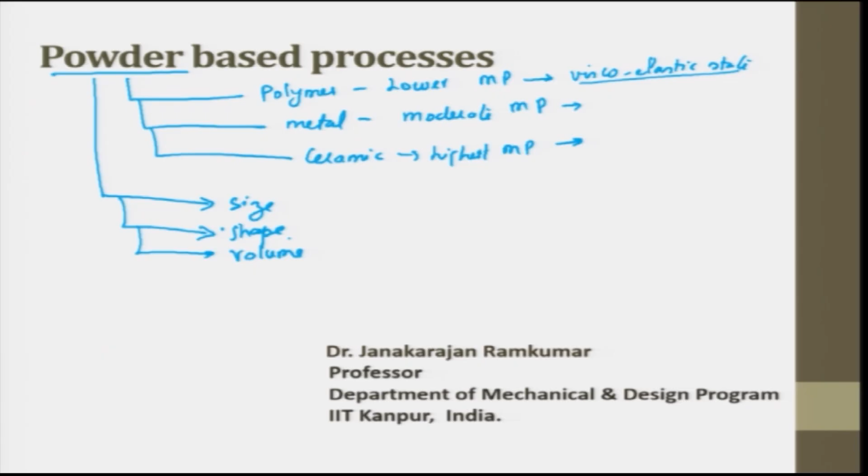So in this lecture, we will be trying to cover what is selective laser sintering process, called SLS. SLS process description will be there. Then we will try to see what is solid state sintering, then chemical induced sintering, then approaches to metal and ceramic part creation, then liquid phase sintering, then distinct binder and structural material.

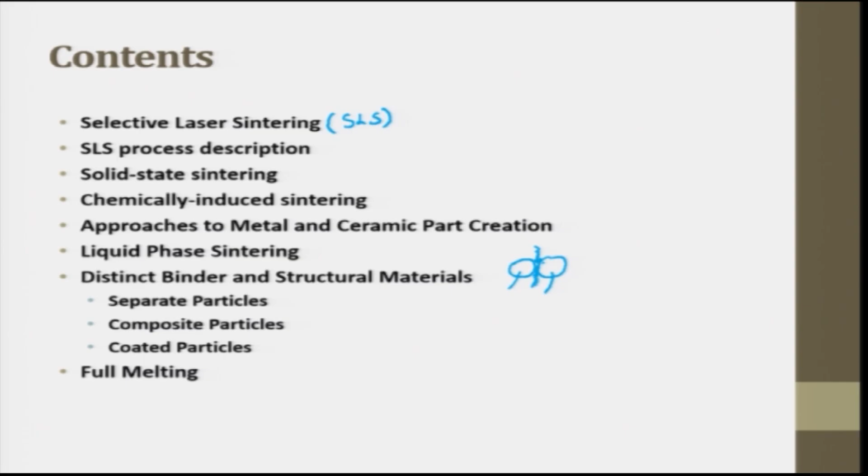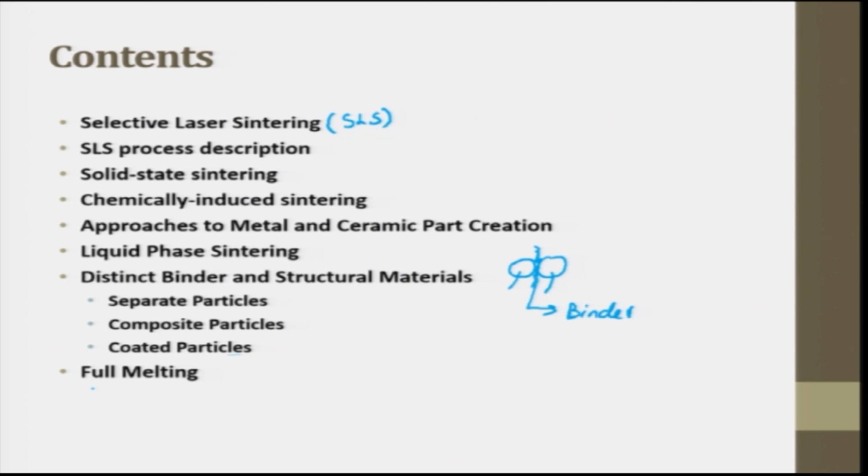Because when we try to have particles like metals and ceramics, their melting point is very high, so in order for these to join, I can't melt it, I can't take it to such a high temperature. What I do is try to add a binder in between. So this binder alone I will melt, and this melt is used for joining these powders. So distinct binders are used. The binders and structural materials involve separate particles, composite particles, coated particles, and finally we will see the full melting process.

The powder bed fusion process were among the first commercialized RM processes, commercially available even before stereolithography could go to its fullest extent. Powder bed fusion: powder bed is the starting material, fusion is the joining. Developed at the University of Texas at Austin, USA, selective laser sintering was the first commercialized powder bed fusion process. All other powder bed fusion processes modified this basic approach in one or more ways to enhance machine productivity, enable different materials to be processed, and or to avoid specific patented features.

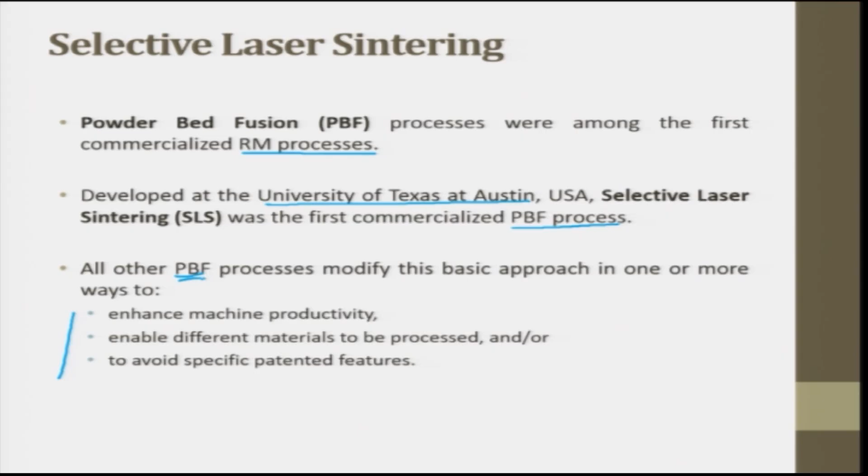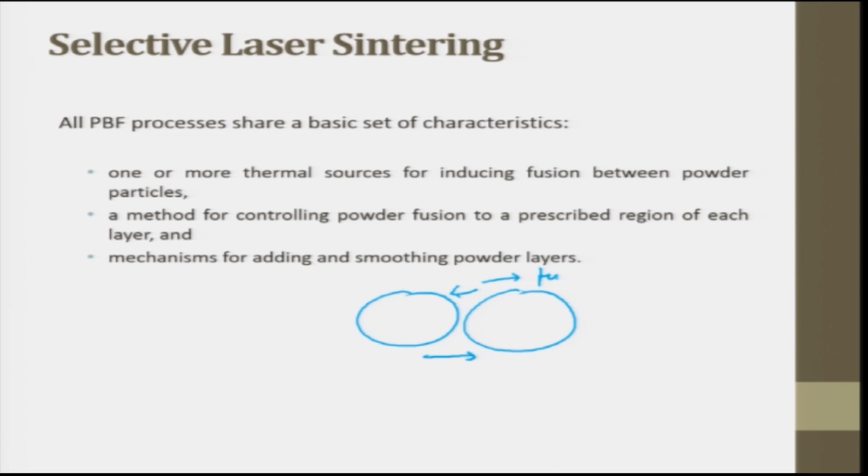So for these reasons, the PBF, powder bed fusion processes, were modified. All PBF processes share a basic set of characteristics: one or more thermal sources for inducing fusion between powder particles. What is fusion? Powder particle joining is called fusion. A method for controlling powder fusion to a prescribed region of each layer, this is what is called selective. Then a mechanism for adding and smoothing the powder layer. So these are the three characteristics.

So if it is clear from the name itself, we selectively sinter using a heat source called laser. Why laser? Laser is more focused, so I can easily achieve selective sintering by using laser. That is why the process is called selective laser sintering process, which is part of powder bed fusion process.

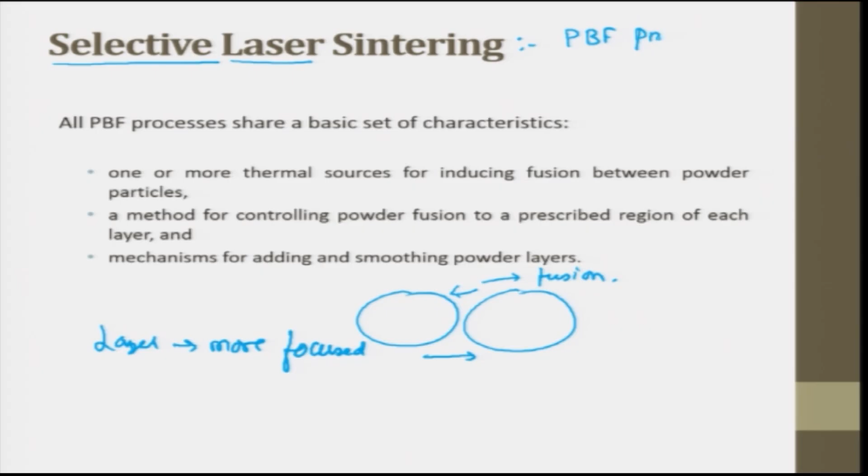The SLS process was originally developed for producing plastic prototypes using a point-wise laser scan technique, which is vector-based, similar to what we used in stereolithography. This approach has been extended to metals and ceramic powders today, with additional thermal sources utilized. Variants of layer-wise fusion of powdered material now exist.

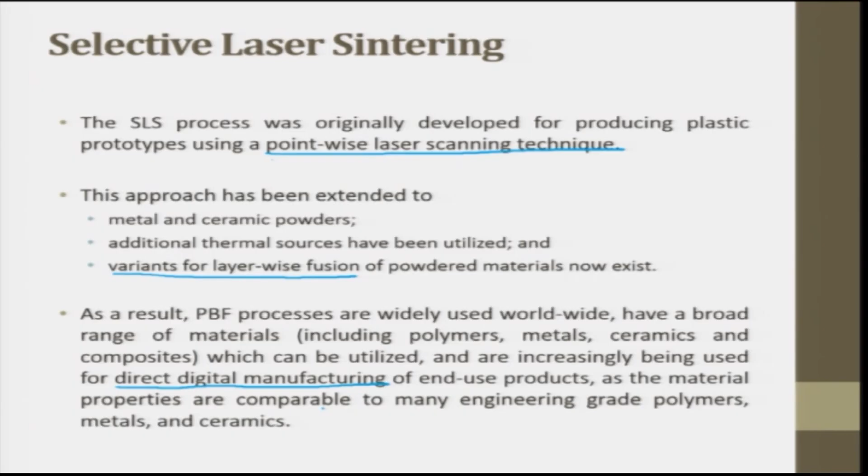As a result, powder bed fusion processes are widely used worldwide, with a broad range of materials including polymer, metal alloys, ceramics and composites, which are increasingly being used for direct digital manufacturing. Rapid prototyping, otherwise called direct digital manufacturing of end-use products, has material properties comparable to many engineering grade polymers, metals and ceramics.

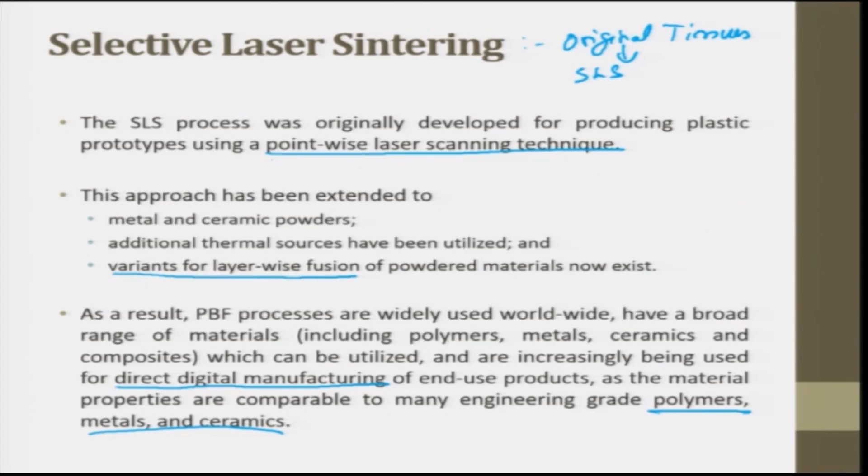Today we are trying to make original tissues which can be printed and integrated into our body. So we use polymers and a process called SLS because we need very high resolution. So tissue which is going to be integrated as part of the body is nowadays printed using this process.

So if you look at the process description, it goes like this. You have a table, and if you see, it is divided into three segments. The second segment is going to be the powder bed.

This powder can be polymer powder, metal powder or ceramic powder. This powder which is fed onto the powder bed comes from the container called the feed cartridge. You can call one the input cartridge and the other the extra collection cartridge, but really these two should both be called feed cartridges.

So you have cartridge 1 and 2, which are feed cartridges, and the powder bed in the middle. The moment I say feed cartridge, the material flows from this cartridge to the powder bed. Every time the table has to sink by a layer, and correspondingly the cartridge has to rise by one layer.

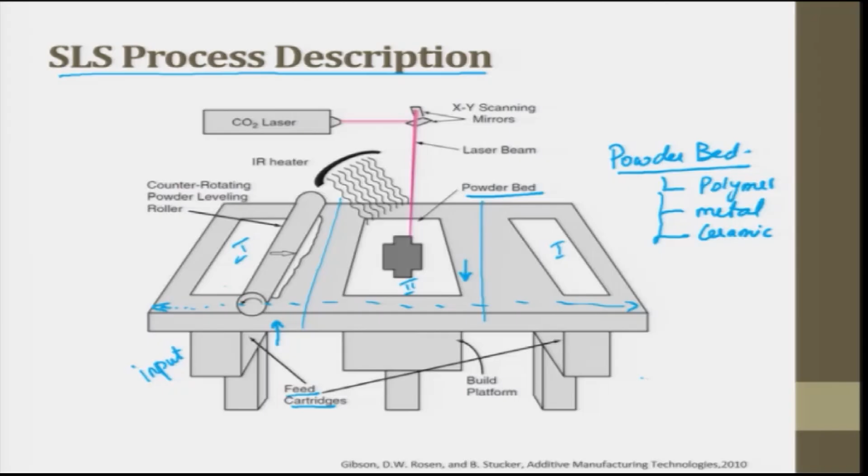Once the roller does this job, then the CO2 laser comes into action. The CO2 laser hits a galvo scanner, and this galvo scanner passes the light to exactly hit selectively on the top surface of the powder bed. When it does hit, it does the boundary and also the hatching, which is all internal hatching, and this forms one layer of information.

Now the table sinks down by one layer of information. The roller on the other side starts pulling up powder from the feed cartridge and keeps moving. Once the powder bed sinks down, that cartridge rises by a corresponding layer thickness, and powder from this side is spread on top of the powder bed. This keeps happening continuously, and finally you get layer by layer of selective sintering, resulting in a finished product.

In between, to maintain or remove moisture, we always use an IR heater. Its function is to remove moisture or excess polymer material, and maintain the temperature such that when the next layer is cured, it sticks properly with the previous layer. Otherwise, if there is no heat, the first layer cures very fast, and when the second layer tries to cure, delamination happens, which leads to defects.

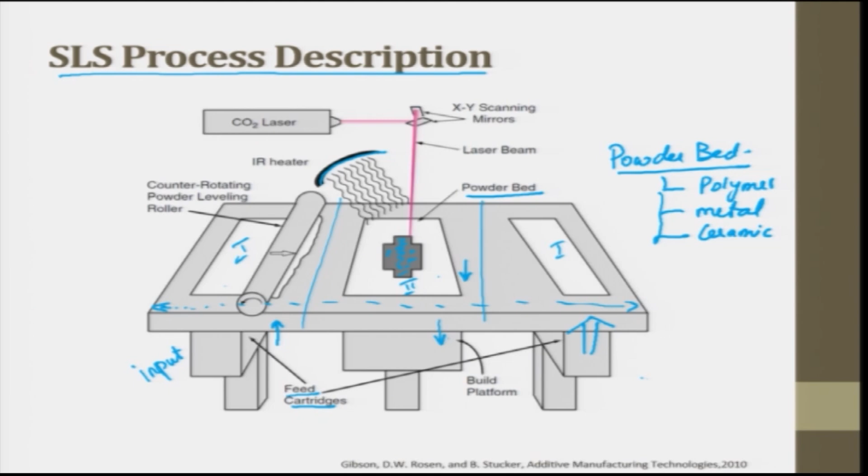So this is what happens in the selective laser sintering process. In order to provide a baseline description of the powder fusion process, selective laser sintering will be described as the paradigm approach to which other powder bed fusion processes will be compared. SLS fuses a thin layer of powder, typically around 0.1 mm.

This is 100 micron. So with the SLS process, being powder based, the layer thickness can be a few hundred microns, which are spread across the build area using a counter rotating powder leveling roller. The part building process takes place inside an enclosed chamber, whereas in the previous schematic diagram it was open.

Generally what we do is perform this in an enclosed chamber, and in that chamber we try to maintain a temperature filled with nitrogen gas to minimize oxidation and degradation of the powder material. Because whenever there is heat, oxidation easily happens. In order to avoid this, we put a chamber and fill it with nitrogen gas.

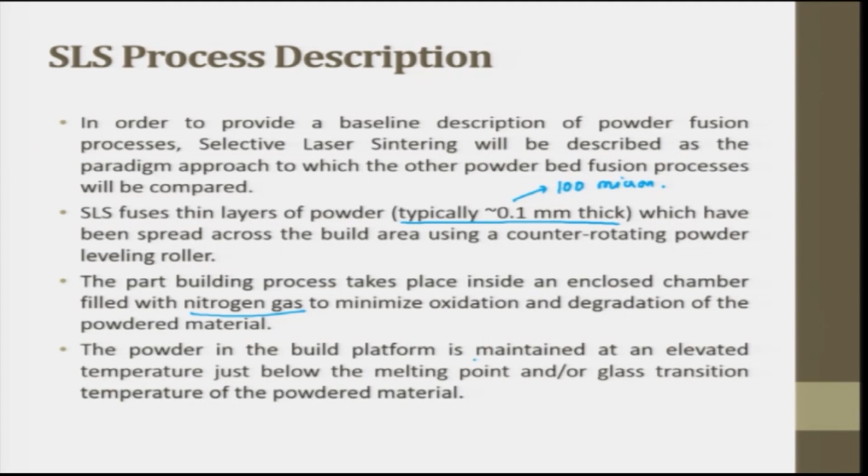Nitrogen gas is non-reactive. The powder in the build platform is maintained at an elevated temperature just below the melting point or glass transition temperature of the powder, such that it sticks with the previous layer.

Infrared heaters are placed above the build platform to maintain an elevated temperature around the part being formed, as well as above the feed cartridge to preheat the powder prior to spreading over the build area. That's what I said - if there is any moisture, or any unwanted polymer slightly mixed in, all these things get gassed away and removed during preheating.

In some cases the build platform is also heated using a resistive heater - it can be infrared or resistive. This preheating of powder and maintaining an elevated uniform temperature within the build platform is necessary to minimize the laser power requirements for the process.

This is a very important point - that is why we try to preheat the powder, necessary to minimize the laser power requirements of the process, and to prevent warping of the part during building due to non-uniform thermal expansion and contraction. So it removes warping, prevents warping, and is necessary to minimize power. These two are important points.

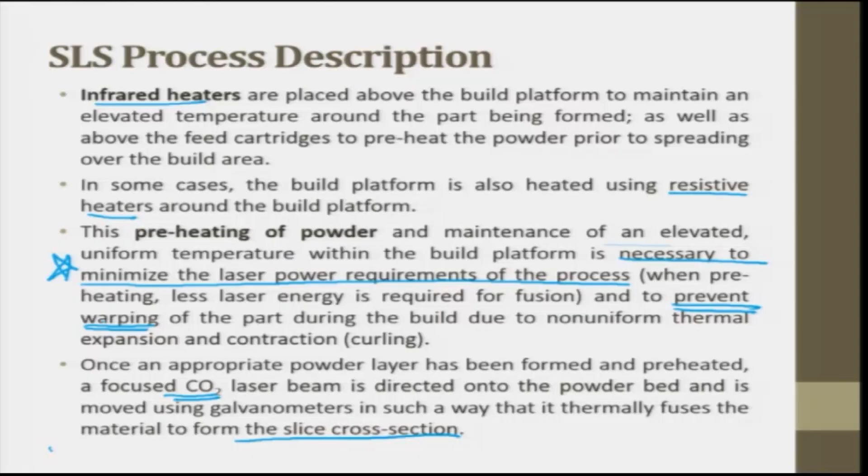The surrounding powder which is not used remains loose and serves as a support. Earlier I was talking about a structure like this, right? We said it will have a supporting structure - so this is a supporting structure.

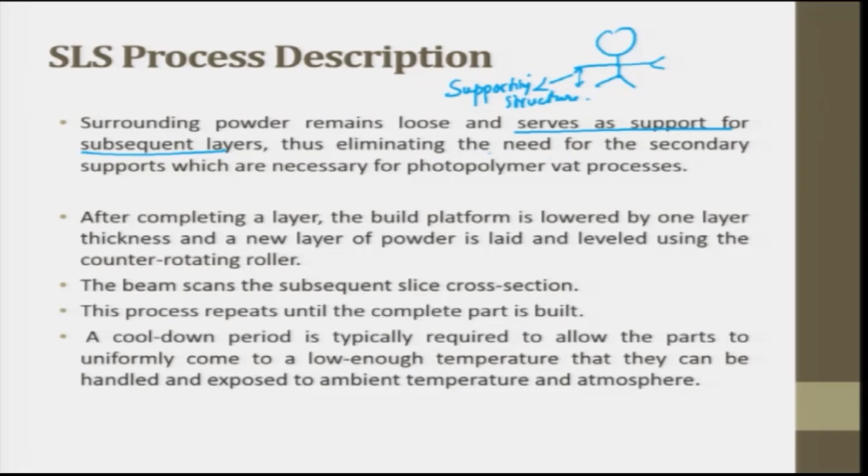In SLS, there is no separate supporting structure needed - the loose powder remains and serves as support. So here we don't put a supporting structure. The powder which is not cured acts as a supporting layer, thus eliminating the need for secondary support which is necessary for photopolymerization vat processes.

After completing a layer, the build platform is lowered by one layer thickness and a new layer of powder is laid and leveled using the counter rotating roller. The beam scans the subsequent slice cross section. This process repeats until the complete part is built.

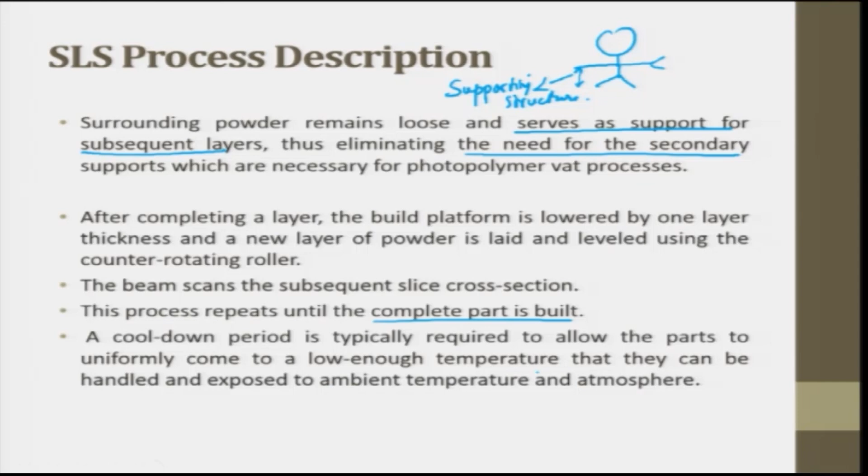A cool down period is typically required to allow the part to uniformly come to a low enough temperature that it can be handled and exposed to ambient temperature and atmosphere. If the part or powder bed are prematurely exposed to ambient temperature and atmosphere, the powder may degrade in the presence of oxygen and the parts may warp unevenly.

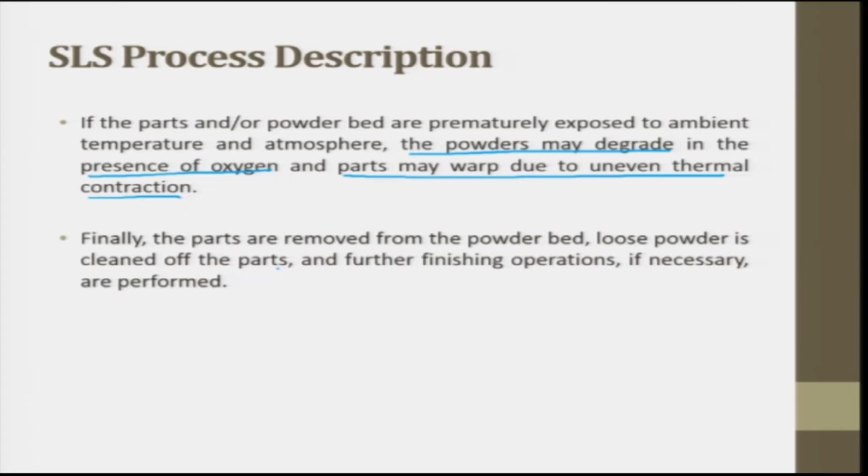Finally, the parts are removed from the powder bed, loose powder is cleaned off the parts, and further finishing operations, if necessary, are performed. These are called secondary operations.

So when we look into the primary powder bed fusion process, we have the following classification - we have four classifications.

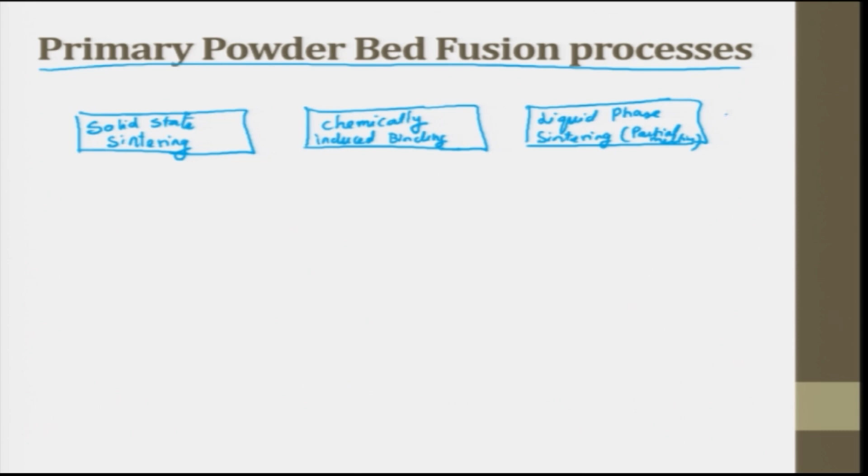One is solid state sintering. Next is chemically induced binding. The third one is liquid phase sintering, which is partial melting. And finally you have full melting.

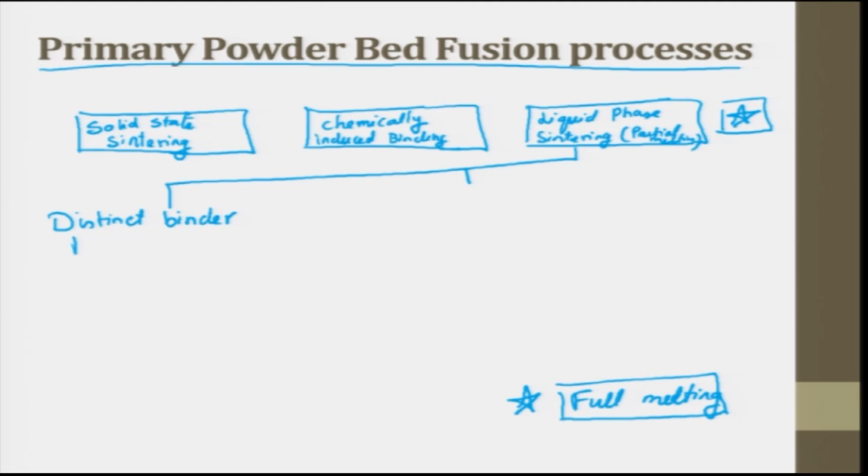This partial is distinct between binder and structural material. One is separate particles, composite particles, and coated particles. When I try to look at it, it's indistinct between binder and structural material.

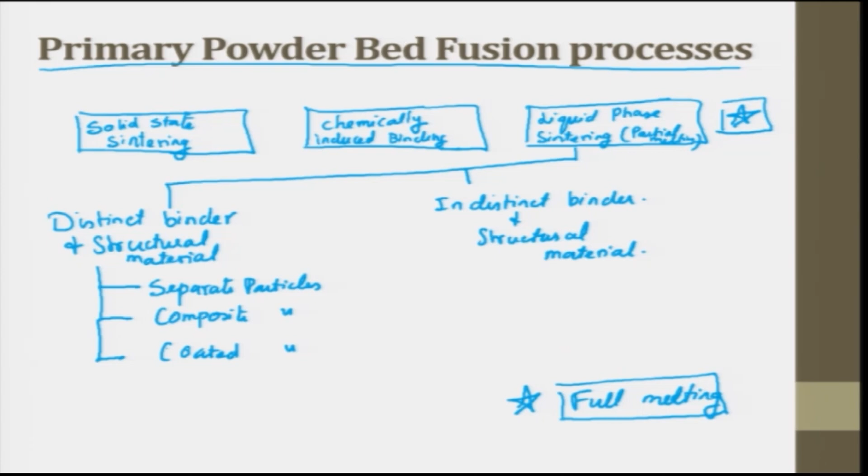This is how we try to classify the primary powder bed fusion processes: solid state, then liquid state, and in between we have chemically induced binders.

Solid state sintering: the use of the word sintering to describe the mechanism for fusing powder as a result of thermal processing predates the advent of RM. Sintering in its classical sense indicates the fusion of powder particles without melting - very important, powder particles without melting.

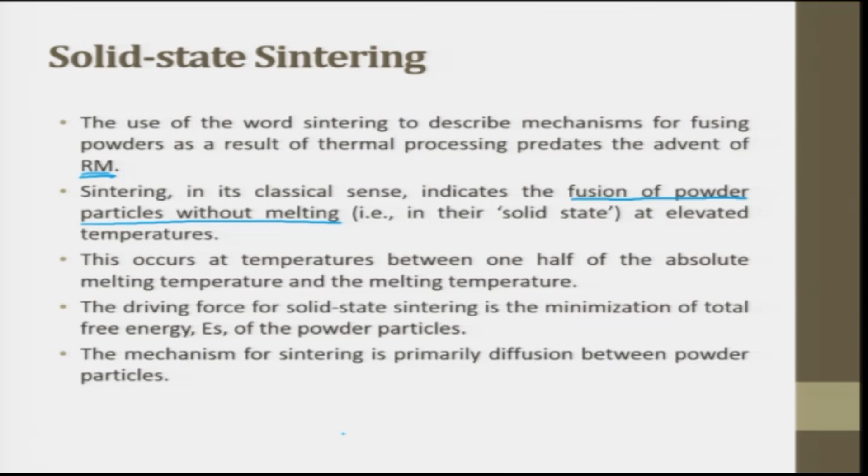So sintering, the other one is called melting. Today we call it selective laser sintering, selective laser melting. So when you talk about melting, it's the fusion of the powder particles - here fusion without melting, and here fusion with melting.

That is in their solid state at elevated temperatures. This occurs at temperatures between half of the absolute melting temperature and the melting temperature. The driving force for solid state sintering is the minimization of the total free energy of the powder particles. The mechanism for sintering is primarily diffusion between powder particles.

This is very, very important. Sintering process, the primary mechanism is diffusion. You have many more mechanisms, but this is the primary one. The surface energy, you can see here, free energy ES.

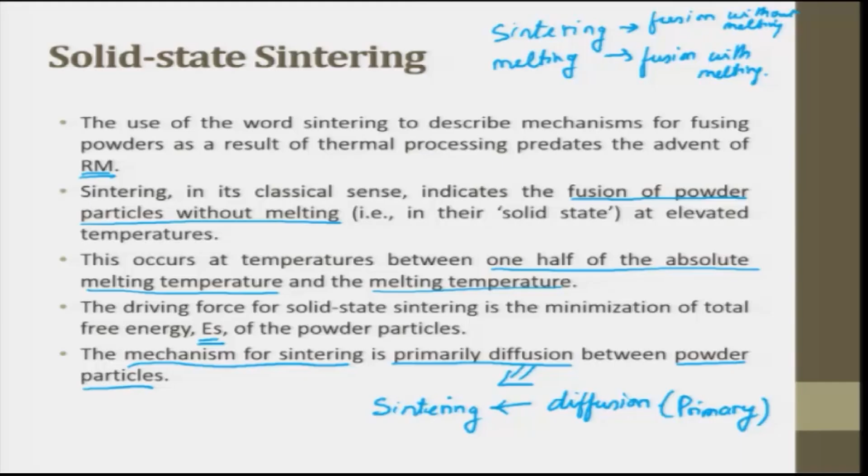The surface energy ES is proportional to the total particle surface area SA through the equation: ES is equal to GS into SA, where GS is the surface energy per unit area for a particular material, atmosphere and temperature.

When particles fuse at elevated temperature, the total surface area decreases, and thus surface energy decreases.

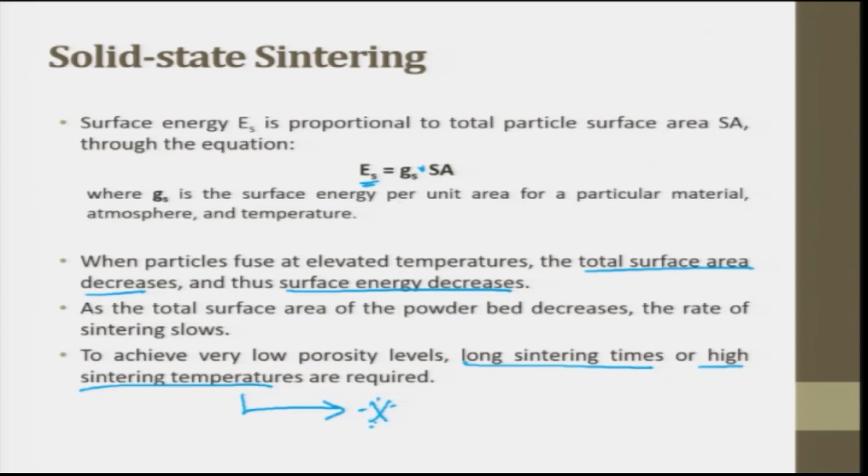As the total surface area of the powder bed decreases, the rate of sintering slows. To achieve a very low porosity level, long sintering time or high sintering temperatures are required. So surface area plays a role, then temperature also plays a role.

What is sintering? It is temperature and time, combination of this. So you can try to reduce the pore size and increase the necking area.

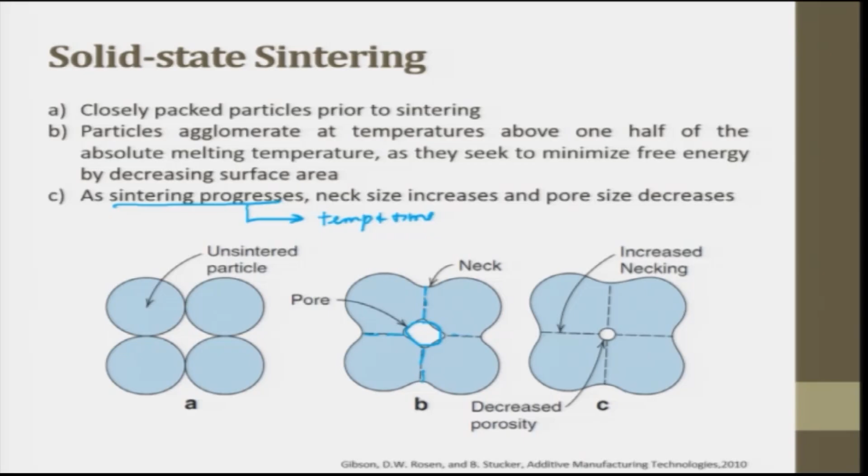As total surface area in a powder bed is a function of particle size, the driving force for sintering is directly related to the surface area to volume ratio - this is nothing but S by V. The total surface energy is related to the S by V ratio of a set of particles.

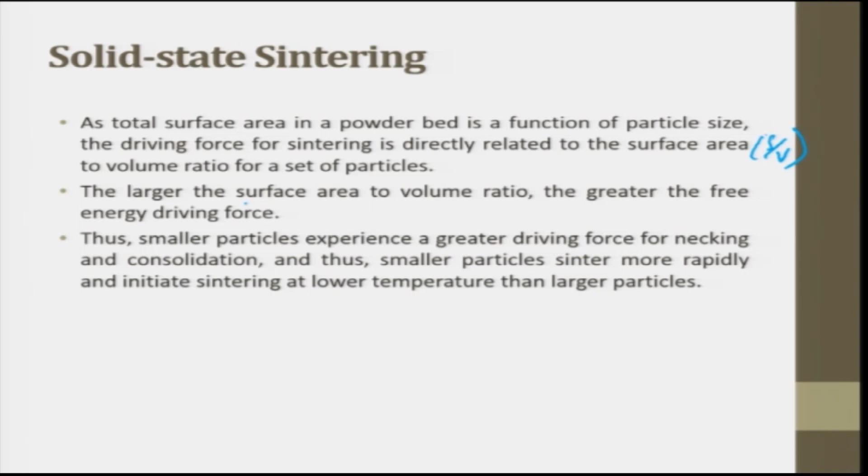So particle size and the volume of the particle, aspect ratio plays a role. The larger the surface area to volume ratio, the greater the free energy driving force. So if the particle size is smaller and smaller, like nanoparticles, the volume will be very small and surface area very high, so you will have a greater energy drive to push the particle.

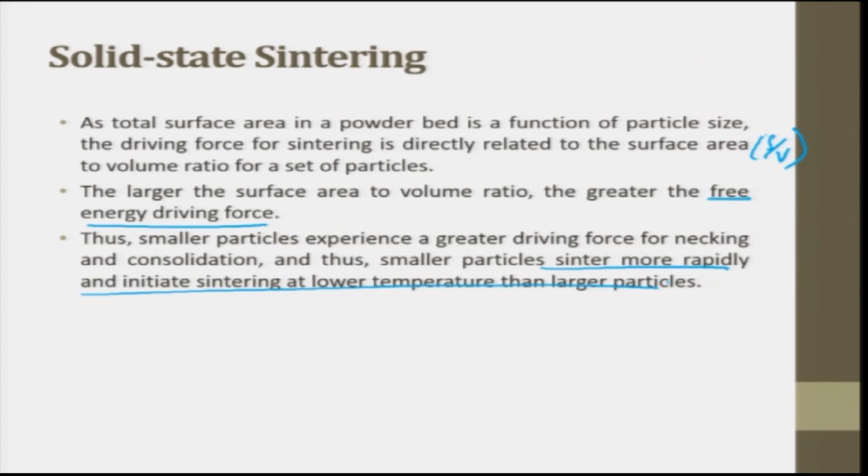A smaller particle experiences a greater driving force for necking and consolidation. Thus, smaller particles sinter more rapidly and initiate sintering at a lower temperature than larger particles. This is a very important point: if you go smaller and smaller in powder size, you will have more driving force and better consolidation. And once the particle size is very small, with small volume and large surface area, the melting point will also reduce.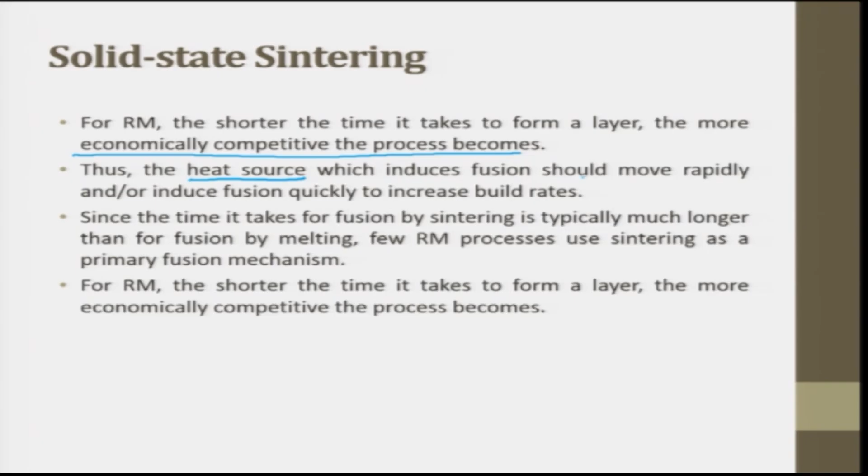For RM, the shorter the time it takes to form a layer, the more economically competitive the process becomes. So you have to use only smaller particle sizes. If you use a larger particle size, the driving force will be less, so you will have to apply more heat, and when you apply more heat, it takes longer to make the parts. Thus, the heat source which induces fusion should move rapidly to increase the build rate.

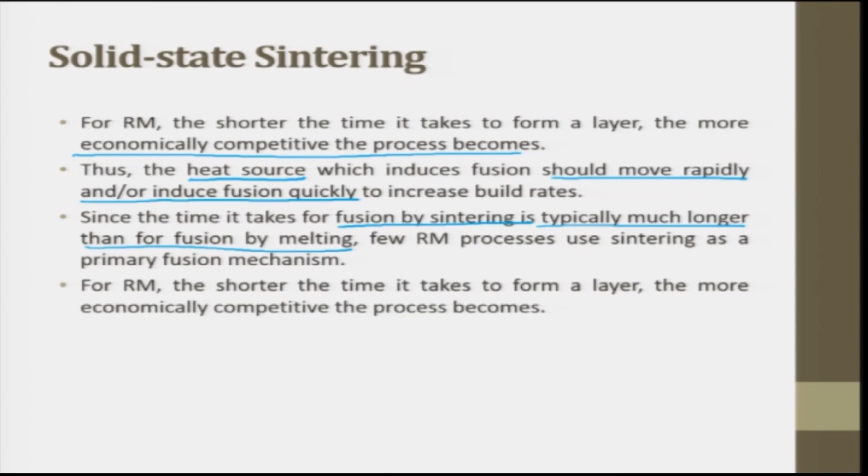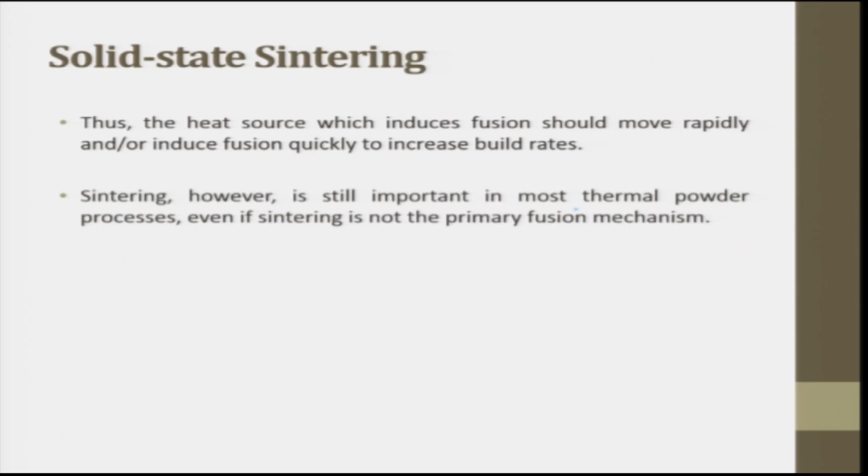Since the time it takes for fusion by sintering is much longer than fusion by melting, few RM processes use sintering as the primary fusion mechanism. For RM, the shorter the time it takes to form a layer, the more economically competitive the process becomes. Thus, the heat source which induces fusion should move rapidly to increase the build rate. Sintering, however, is still important in most thermal powder processing, even if it is not the primary fusion mechanism.

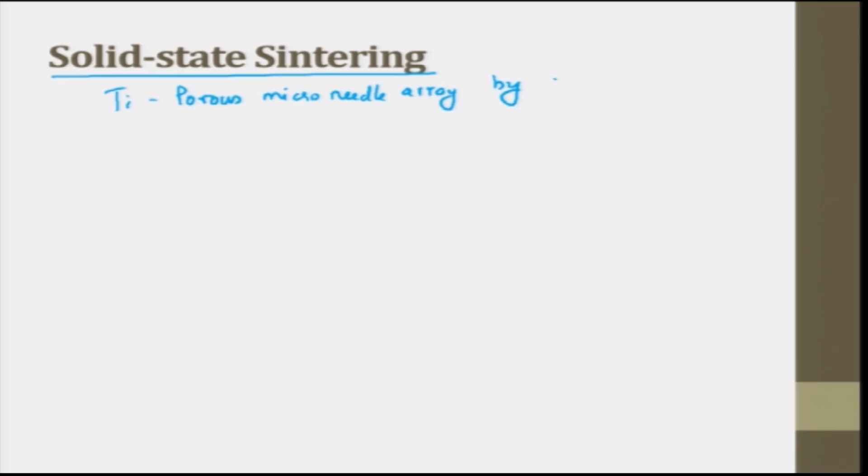So let us try to see the solid state sintering for a typical titanium which is porous and used for forming a micro needle array by metal injection molding. I will just try to draw the sintering cycle.

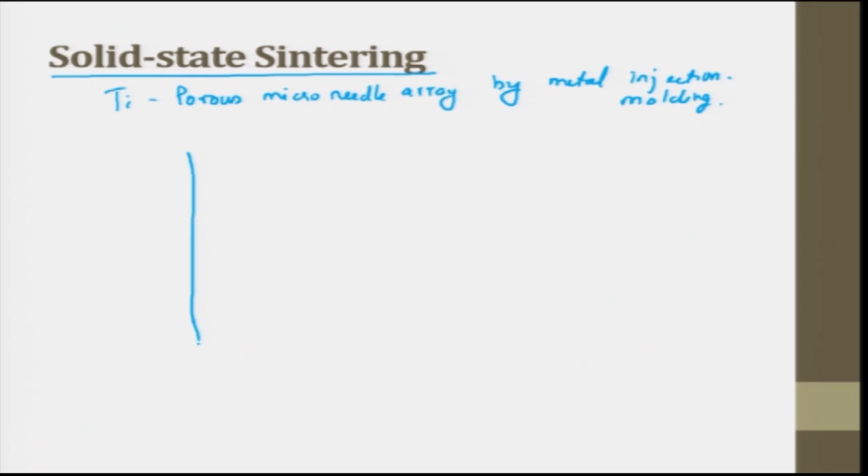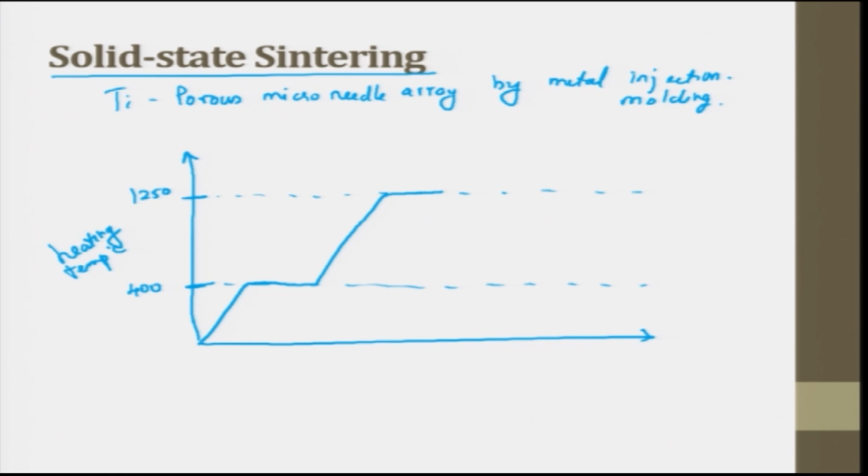So this is the heating temperature: 400 degrees, 1250. Sintering time on this axis, sintering temperature on that axis, all in degrees Celsius.

So here what we do is we divide it into 3 stages. The first stage is called the debinding stage. The next one is called the sintering stage. And the last one is called the cooling stage.

Here you hold it at 1250 degrees Celsius for 2 hours. Here it increases at 8 degrees Celsius per minute to reach that point. Here you take 4 to 5 degrees Celsius per minute, and here you take 2 to 3 degrees Celsius per minute. So this is a typical sintering cycle.

If you see here, you can't go straight to 1250 and start the sintering process. You do it step by step, and at every stage you maintain it for some time. This is called the soaking time - you soak it, then ramp it, then soak it again, then do the cooling stage. So this is a typical cycle.

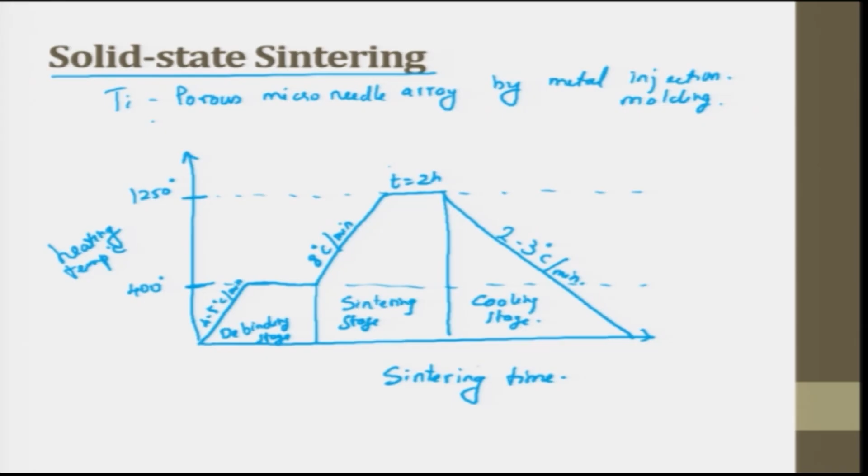There are 3 secondary ways in which sintering affects a build. The first secondary way: if the loosened powder within the build platform is held at an elevated temperature, the powder bed particles will begin to sinter to one another.

So you can't keep maintaining a very high temperature. After some time, you have to maintain a slightly lower temperature such that it does not sinter. This is typically considered a negative effect, as agglomeration of powder particles means that each time the powder is recycled, the average particle size will increase because it is all getting stuck.

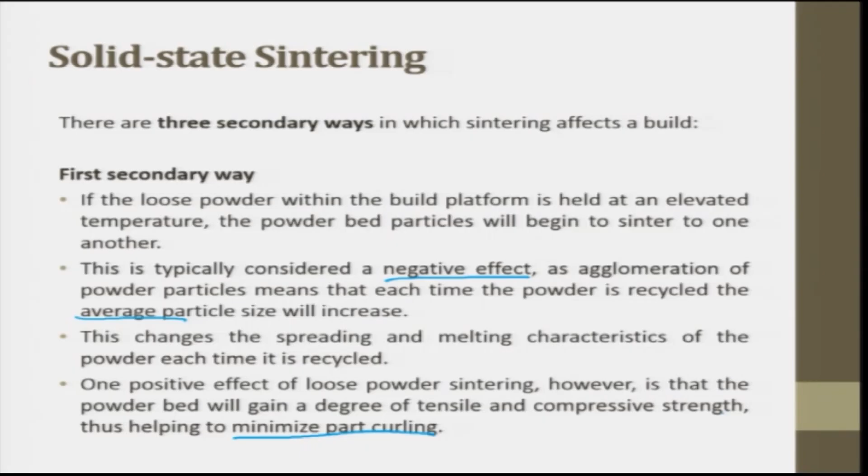This changes the spreading and melting characteristics of the powder each time it is recycled. One positive effect of loose powder sintering, however, is that the powder bed will gain a degree of tensile and compressive strength, thus helping to minimize part curling. So when there is pre-sintering happening, you also get this advantage: curling will not be there.

As the part is being formed on the build platform, thermally induced fusion of the desired cross-section geometry causes that region of the powder bed to become much hotter than the surrounding loose powder at the cross section. If melting is the dominant fusion mechanism, then the just-formed part cross section will be quite hot, as in selective laser melting.

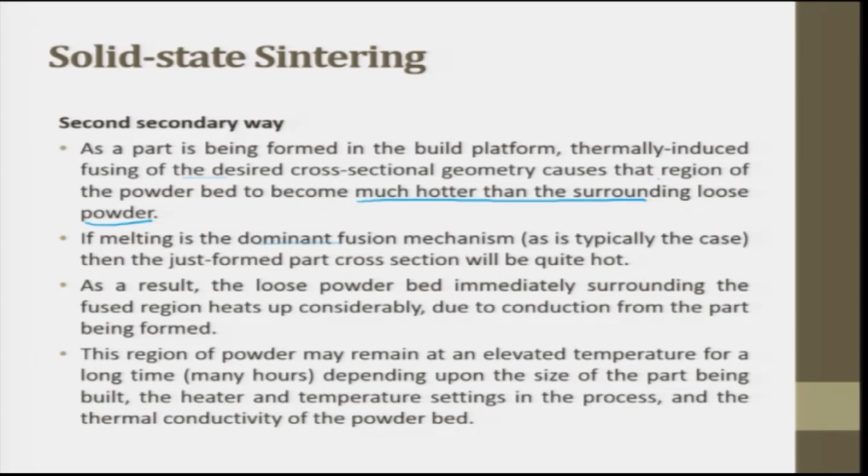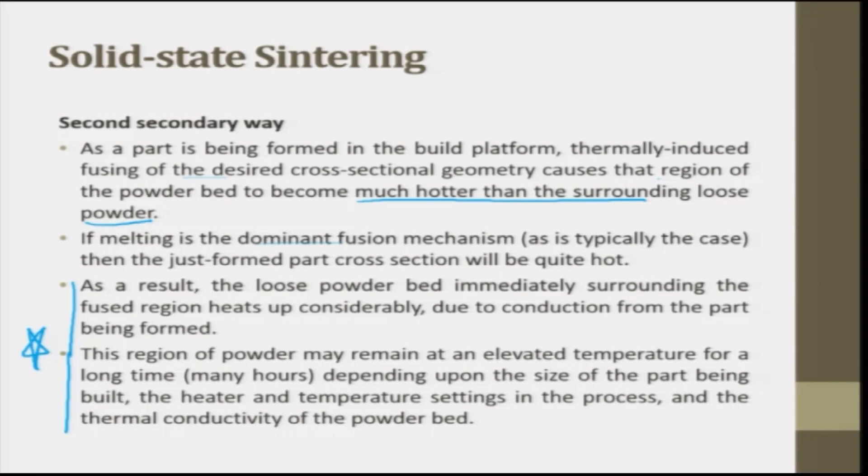As a result, the loose powder bed immediately surrounding the fusion region heats up considerably due to conduction from the part being formed. This region of powder may remain at an elevated temperature for a longer time depending upon the size of the part being built, the heater and temperature setting in the process, and the thermal conductivity of the powder bed. So this part and this part are important — thermal conductivity of the powder bed plays a very important role.

There is sufficient time and energy for the powder immediately next to the part being built to fuse significantly due to solid state sintering, both to itself and to the part. So next to the part there will be sintering happening. This results in part growth, where the original scanned part grows a skin of increasing thickness the longer the powder bed is maintained at an elevated temperature.

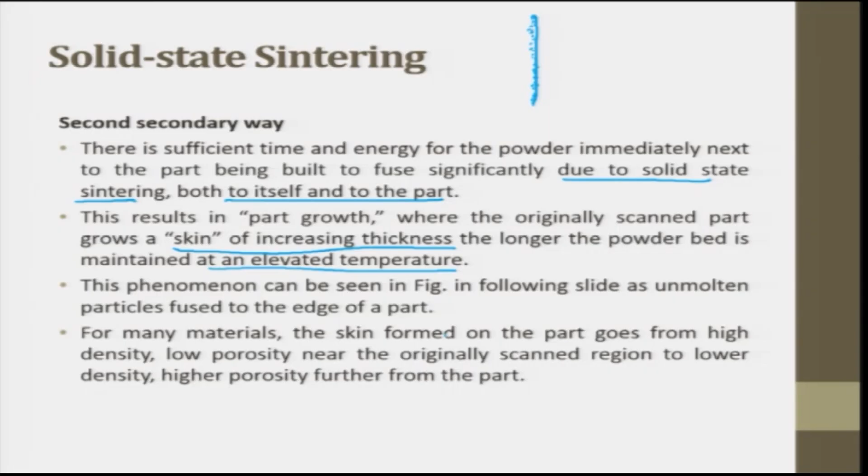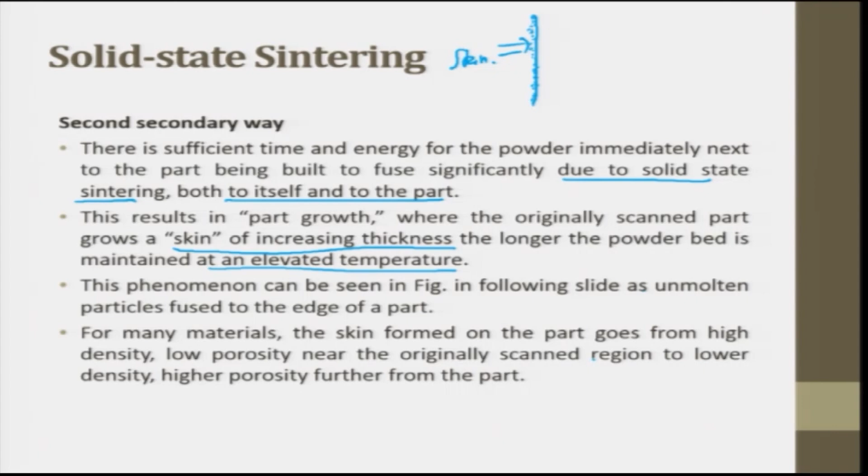This is what they call a skin, which is getting stuck to the surface. This phenomenon can also be seen in the next figure, as an unmolten particle fused to the edge of the part. For many materials, this skin formed on the part goes from higher density, low porosity near the original scanning region, to lower density, higher porosity further from the part.

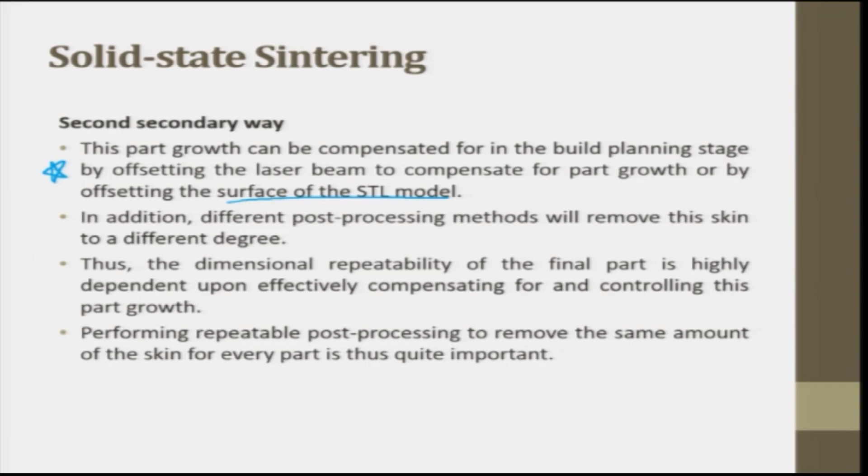This part growth can be compensated for in the build planning stage by offsetting the laser beam to compensate for part growth, or by offsetting the surface of the STL model. So this is also a very important point. In addition, different post-processing methods will remove the skin. Thus, the dimensional repeatability of the final part is highly dependent upon effectively compensating for and controlling the part growth.

The third secondary way: rapid fusion of the powder bed using a laser or other heating source rarely results in 100% density and porosity-free parts. Thus, a feature of most parts made using the powder bed fusion technique is distributed porosity throughout the part. This is typically detrimental to the intended part properties, so this is what is happening inside.

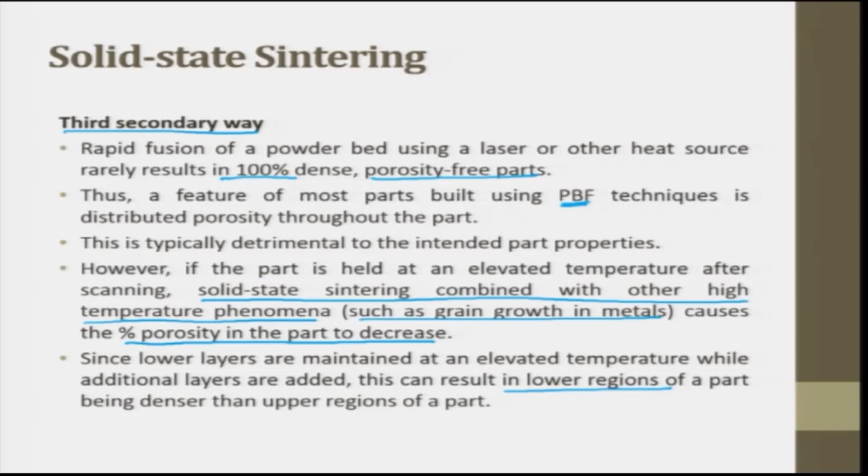However, if the part is held at an elevated temperature after scanning, the solid state sintering combined with other high temperature phenomena causes the percentage of porosity to decrease, such as grain growth in metal. Since lower layers are maintained at an elevated temperature while additional layers are added, this can result in the lower region of the part being denser than the upper region. This uneven porosity can be controlled to some extent by carefully controlling the powder bed temperature, cooling rate, and particle size.

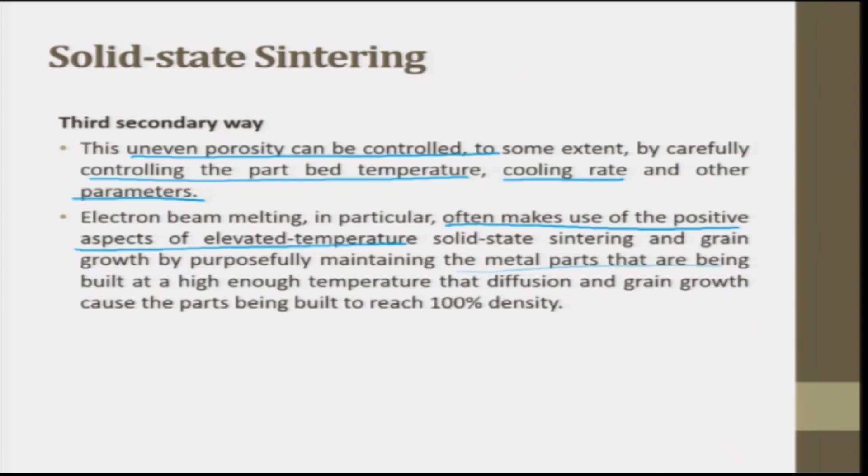Electron beam melting, replacing laser with electron beam melting in particular, often makes use of a positive aspect of elevated temperature solid state sintering and grain growth, by purposefully maintaining the metal part being built at a high enough temperature that diffusion and grain growth cause the part to be built to 100% density. Thank you very much.